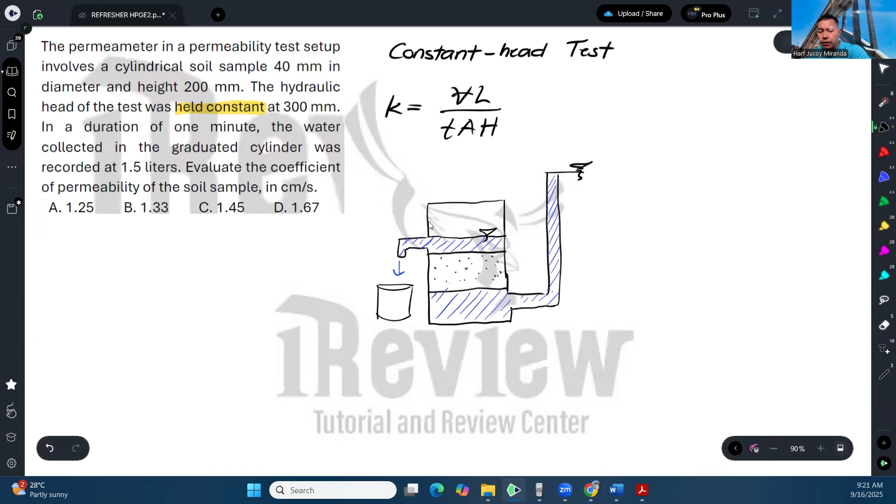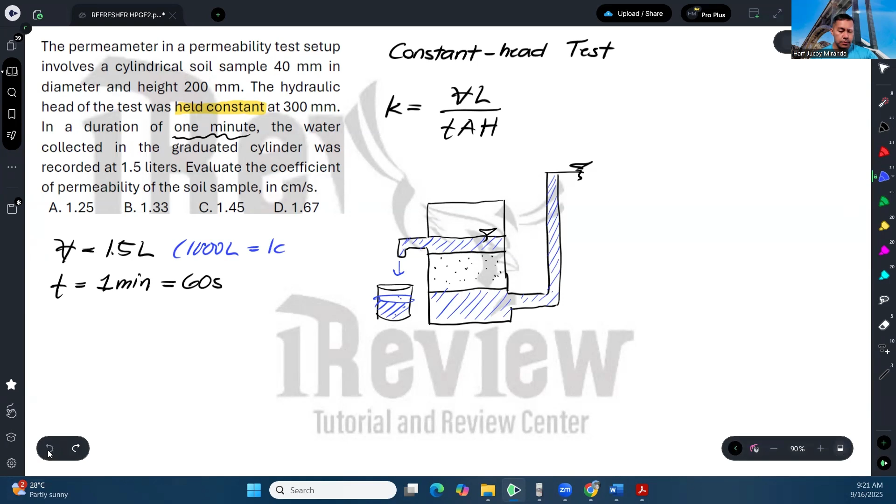Kung gaano yung katagal. And according to the problem, the volume of water collected is actually 1.5 liters, in a time or duration of 1 minute, or that is 60 seconds. Okay? So, dito kailangan lang kabisado natin na for 1,000 cubic centimeters, that is equivalent to 1 liter. Kasi kailangan ng sagot natin naka-centimeter eh. So for 1 liter, that is equivalent to 1,000 cubic centimeter. Okay? Para mamaya pag nag-convert, mas mabilis.

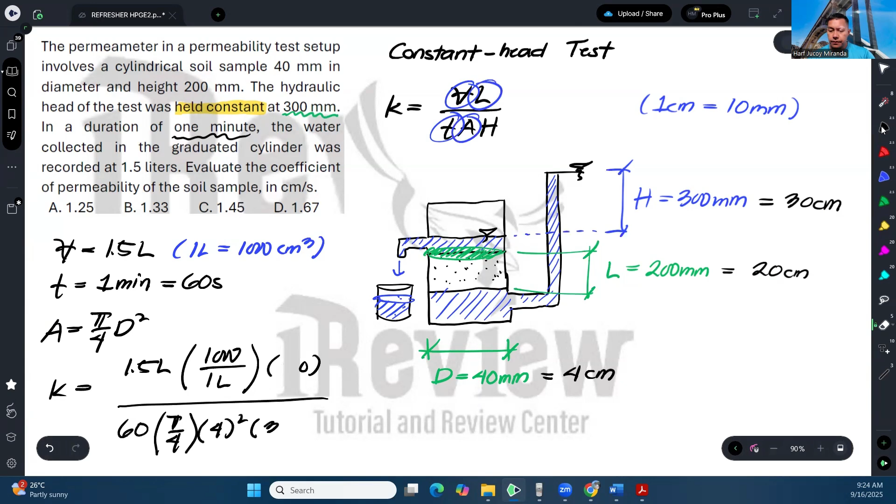Okay, so that means this is 30 over time, which is 60 seconds, kasi kailangan din naka per second. And then the area is pi over 4 times 4 squared. Tapos yung h natin is 30. Sorry. Yung L pala natin, 20, sorry. 20 pala to. Ito yung 30. Ayan. Okay?

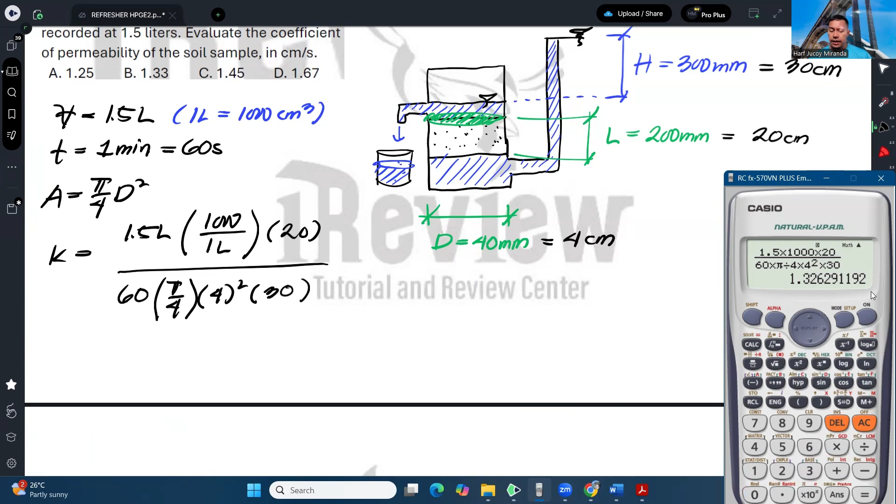So, solving, we have 1.5 times 1,000 times 20 over 60 times pi over 4 times 4 squared times 30. Okay, and that gives us approximately 1.33 centimeter per second.